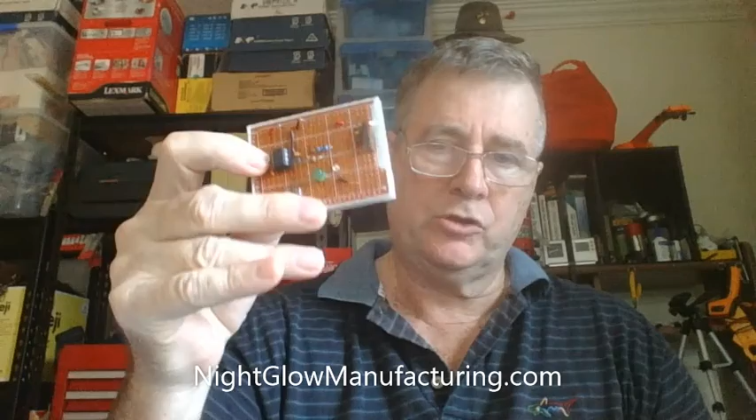What we're going to do is make this little project box that I built for this little board. This is a standard size board you buy, just perf board, nothing special. You can buy these in packets—I bought a packet of 50 or something. What they do is hold your little testing or prototyping projects. This is a testing one.

This takes a programmer. But as you can see, the box just holds my little perfboard PCB and stops all this stuff from shorting out on your desktop. Pretty handy little thing—that's the permanent home for that one, made specifically for that. I cut this out, but I could have incorporated that into the design had I thought about it a little bit more.

As it stands, this little board has done its job. I'm now finished with it, and I need to make a couple more for different reasons. It's actually led me in a new direction of research, and I've got to build a couple more boxes, so I thought I'd do that and share it with you guys.

What we're going to do is open up a copy of OpenSCAD. I want to rebuild the file for that little perforation box step by step with you, and explain what it is I'm doing as I go. Now, what I'm going to teach you is a thing called object-oriented design. It's not in the strictest form object-oriented programming—let's get that out there. It's not that.

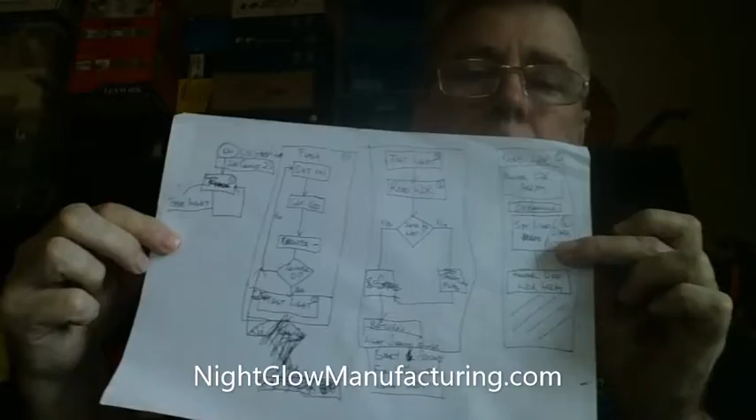What you've got to start off with is some kind of idea of what you're trying to design. Now, what I did was I drew mine out on a piece of paper, and I'm going to do that again right now. I want you to see that nothing happens without some direction. The best way for people to get direction, I think, is to sketch it out. Everything I do has sketches in it—it may not look like much, but these are all plans for things. This is another plan I did for something else. So you always want to start with some idea of what you want, and I always find it helps, even if it's a stick figure, to kind of sketch it out. Even with just an old pen someone gave me from Australia Post, I want to sketch out what this thing's going to be.

So I'm just going to really quickly design this thing. It's going to have—now I know you can't see what I'm doing, but I'm just going to sketch it out. I'm not the world's greatest drawer, let's put that out there. This thing's just going to be like this. It's got to have a bit there for the programmer to come in.

It's got to have a thing in the corner. It's got to have a thing to support the PCBs. So they got to be in there.

I'm not the best drawer in the world, but you'll get the idea when you see what I've come up with. So there it is, and that'll go there, down, you know. So that's basically what we're going to be building.

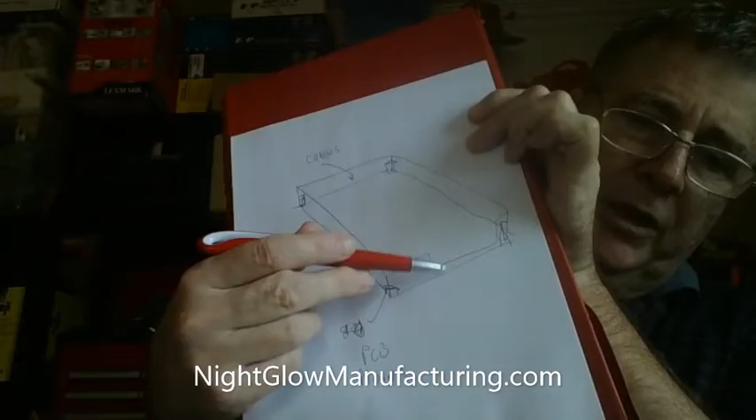So we've got a chassis and we've got PCB mounts, and this thing here will be the cutout.

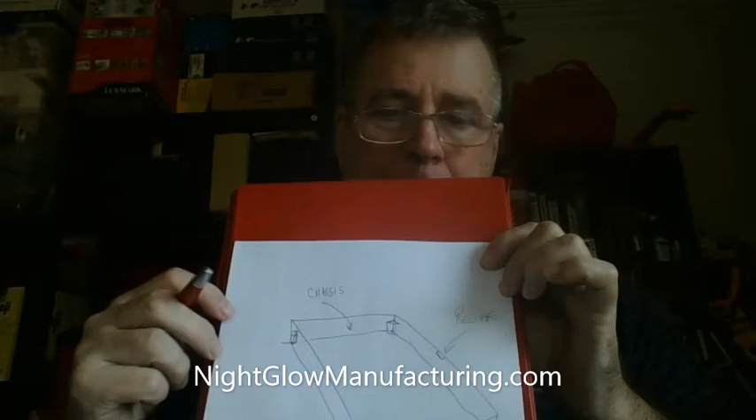I'm also going to put one other thing in the box which I find would be useful. I'm going to put a relief notch in it so you can stick a screwdriver in under your board and flick it up out of there. Because when you're building the board, sometimes you've got to make changes to it, and it's not always good to stick something in underneath this, which is a little bit fragile, and it really needs more support.

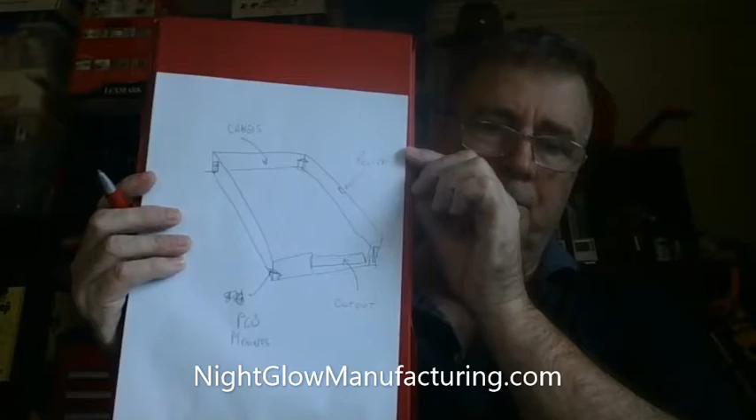Actually, that's something to think about, whether you build a little thing underneath it to give it some more support, because it's where the plug goes, right? And it can get quite fragile, so you might think about what you need in there.

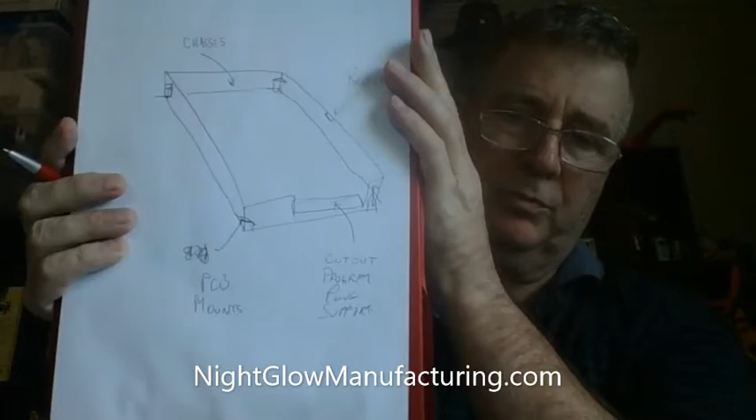So: cutout, programmer, support. So that could be a program plug support. I'm going to think about that and think about whether to include that or to do that as a modification to the design at some point down the road.

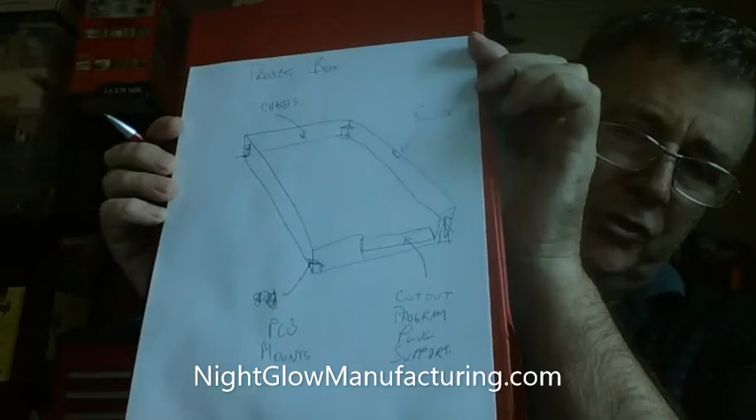That's our box. And I'm going to call this our project box. So now what I'll do is I'll start a folder called Project Box Design, and I'll put that in it, right? And we'll keep that.

Now the first thing we need is some measurements, and what we're going to do is we're going to measure off something that we've already got. Now I already know what these measurements are, obviously, but I pick up one of my boards and I want it to fit these boards. So I already know my length. My length goes this way, that's my Y, and that's my X. So that's my X and Y inner dimension. So we've got the X and Y inner dimensions, right?

Then I want to decide how thick this is, and what I've done is I've made this 2 mil thick. So I'm just going to make some notes on a bit of paper over here. I've got my X dimension, Y equals, right? And I'm gonna call Z... I think I called that 10 millimeters.

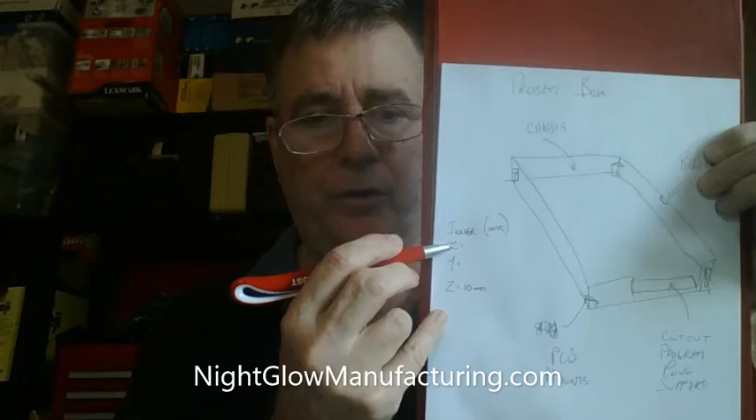Righto, so from this scratch we've now got ourselves a plan, right? So we've got our inner dimensions X, Y, Z. I know these values, I'll get them from the software and fill these in later on, but this is our plan, this is what we're working to.

And what we're going to do is we're going to build this as a module, we're going to build the chassis as a module, which is basically our box. We're going to build our cutout as a module, and we're going to build our relief as a module. Okay? So this and this will basically be the same thing, only they're going to have different dimensions.

Right, it's going to be a much bigger cutout than this is. Righto, so let's get into it, let's start working with it.

Now I'm going to swap cameras.

Now all we've got to do is collect all this. We collected this here. We've got X, Y, and Z. We've also got a thing called thickness, which we've called thick.

And I'm going to call that 2 millimeters. X and Y we don't know, so there are our dimensions. We know the thickness of our PCB, right? It's 2 mil, so it's the same as thick.

Alright, so let's just call it a value, and that way we can change the height of the PCB in the box. So let's call it the PCB offset from the top. Let's make it 3 millimeters.

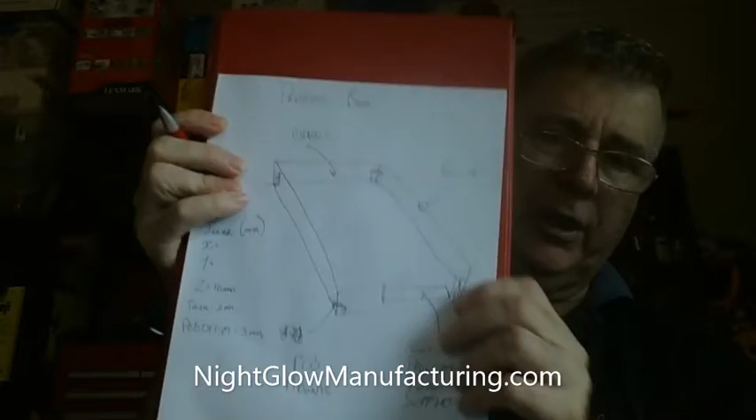Right, so we've collected some variables, here they are, here's our variables. We've collected some objects, here they are, we've got those. Now we're ready to start thinking about how do we bring this together as a project. How do we do that?

Well, the answer is we follow our plan. Well, let's get into that. Now I'm going to swap cameras on you.

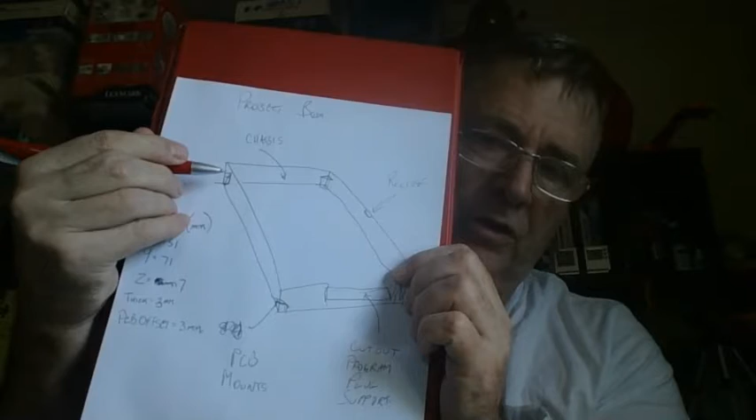We used a 3mm shell wall, and our PCB offset is actually the same as our thickness. So the depth from here to here is 3mm, and the wall thickness is also 3mm.

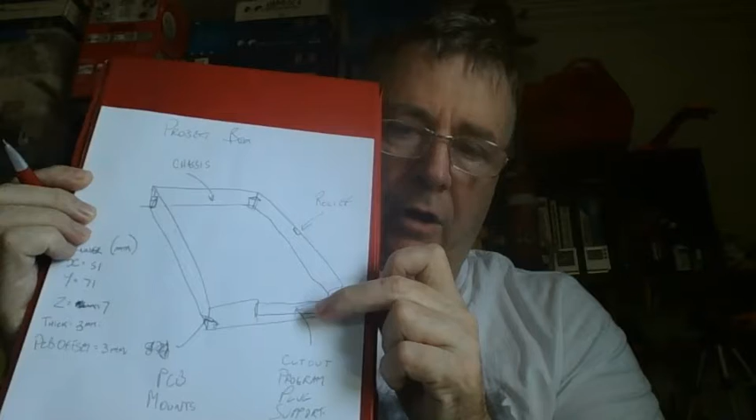Now I haven't decided about this yet, except that the depth needs to be whatever the PCB depth is, plus 1 millimeter, so you can get a screwdriver blade under it and pry it up. So this relief here, this will be 4 millimeters, which equals PCB depth plus 1 millimeter. So we're getting together some values for the properties of these objects.

That's what we're doing, and as we're going, we're modifying our drawing. So we've got our X, Y, and Z. We've got our thickness of our wall. We've got our PCB offset, so this is the offset.

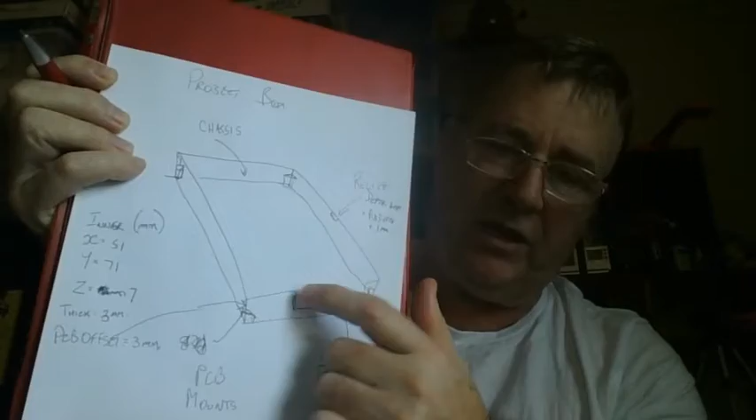I've just done this roughly. So our offset now has an arrow to this that represents that gap. We haven't got these dimensions yet, which we can get fairly quickly because we've got them right here.

It's exactly 40 mil, so that's 40 mil. We could get away with 35 because it's got bevels, with these beveled edges, these rounded edges. That's 35, and that gets us in deep enough.

So let's make it 35, our gap. That'll do me. Alright, so it's going to equal 35. It's in the wrong place. 35 millimeters wide.

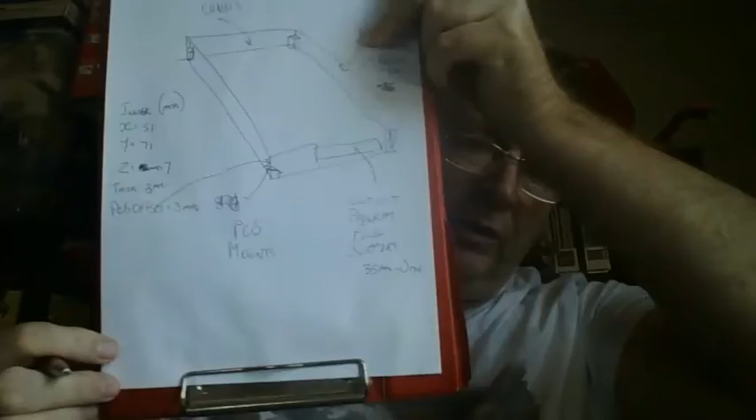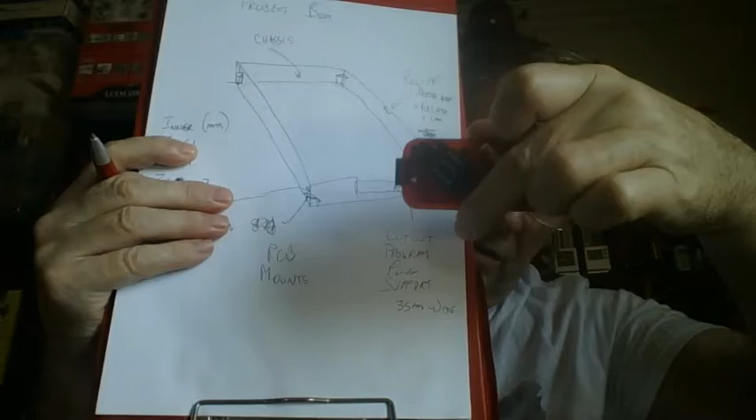So what I'm doing is I'm adding more properties. This is our cutout. This should be 35 millimeters wide, so that the end of that can go into it. So that'll go in — look at that, almost drew it to scale. How's that? How good's that? Almost drawn to scale. How's that for a coincidence?

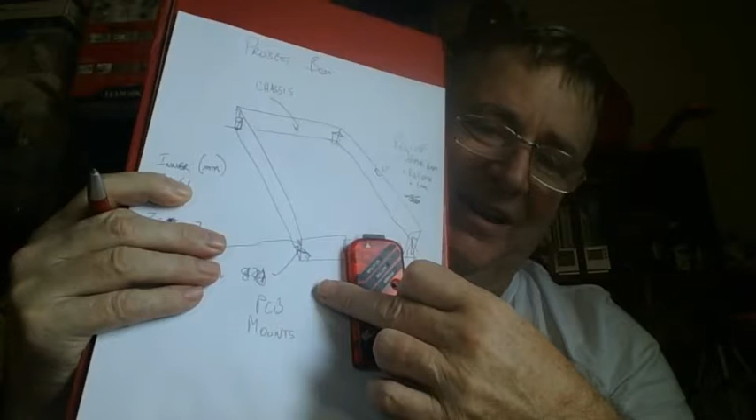It's a sheer fluke, but it'll go in enough that it'll connect with the — what's that thing called? It's called a header, right? That's what it's called.

Alright, so what else? I really don't know what else to do other than to get into it.

I've got a whole bunch of measurements. I'm going to swap over to the onboard camera.

I've changed my shirt, as you can see. It's still really hot here. It's humid. The Australian bushfires have not gone anywhere, they've really made our weather stupid. And even though there's a breeze out there, it's blowing in the wrong direction for this unit to capture it. So I'm getting a little bit of a breeze every so often, but once you get out of the breeze, it's hot and muggy. You wouldn't believe just how hot it is.

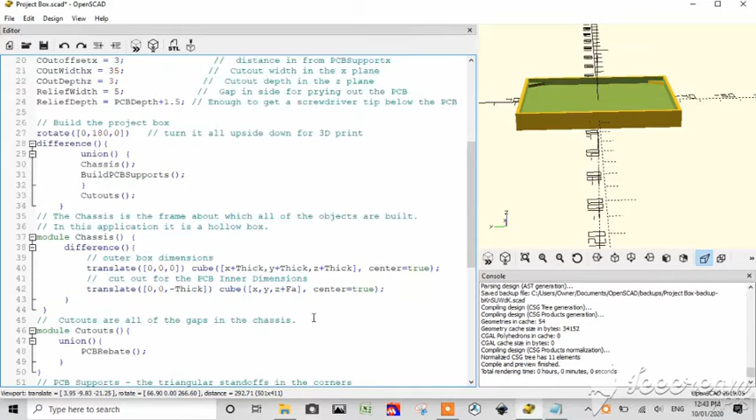So we're just going to keep pressing forward. OpenSCAD open, and I always start out my projects — just don't read into all this stuff for the moment. I just want to talk to you about how to lay out your project. I always start out with, you know, what version and what the project is. So this is version 1 of our project box.

I always use who's done it — if one of my employees has done it, their name would be in there. Why is it whenever I start to record, some idiot goes up the street? Anyway, or either that or the whippersnipper guy starts up. Anyway, designed by me, and the date I designed it — I actually did this on the 21st of August in 2019. So I actually made this sketch some time ago. I've now decided to release this, so I'm going to put a disclaimer in here, and that's it.

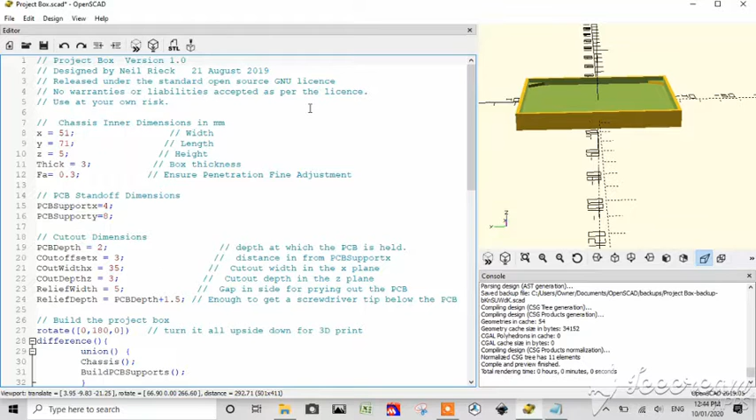Okay, but a project box doesn't require any further explanation. It is what it is — it's a box. So now what I'm going to do is build this with you on the screen. Here's one I prepared earlier.

Where we actually build it is right here in this section. This is it. So what we do is we create the chassis, which is this outer box. Let's show you - I'm going to comment out the pieces.

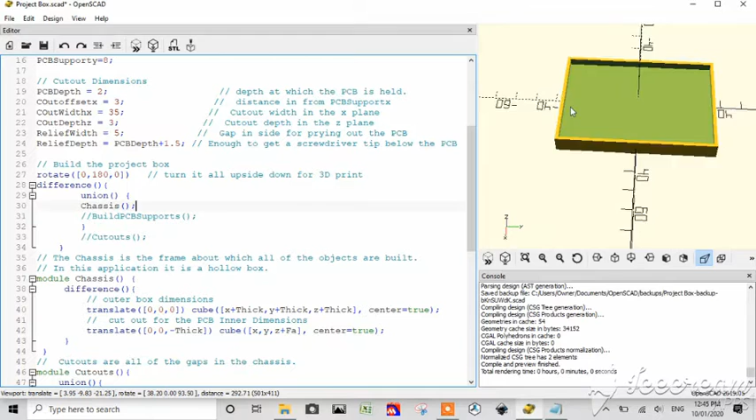Now the two slashes like that are comments. So I've commented out everything other than the chassis. Alright, so the chassis is over here. Here it is, and what this is, is a box. There's nothing special about this - it's a hollowed out box. It's essentially one cube inside of another cube. That's all it is. In our instance, what we've done is we've built this chassis.

And here it is. The chassis is the frame about which all of the objects are built. In this application, it's a hollow box. If I had a more complicated shape, it would go in here, or it would be built here as a result of whatever properties and methods go into making it up.

Now here you can see I'm using some variables. Here's my cube, my first one, outer box, and I'm saying I want a cube. Now at this point I'm going to show you something. If you're connected to the internet, you have a fairly substantial help available to you.

You need to be connected to the internet, and here's a thing called a cheat sheet. Now this cheat sheet is your best friend. So when we go in here, you can see it's going to OpenSCAD's cheat sheet index, and this hasn't been updated since May, right, for this particular version.

Now here's our cube. It's a 3D object, and here is the syntax for the script - cube, size, center, blah blah blah. And down here somewhere, there it is. It's also got a thing called box, which can do the same thing. But here's your cube.

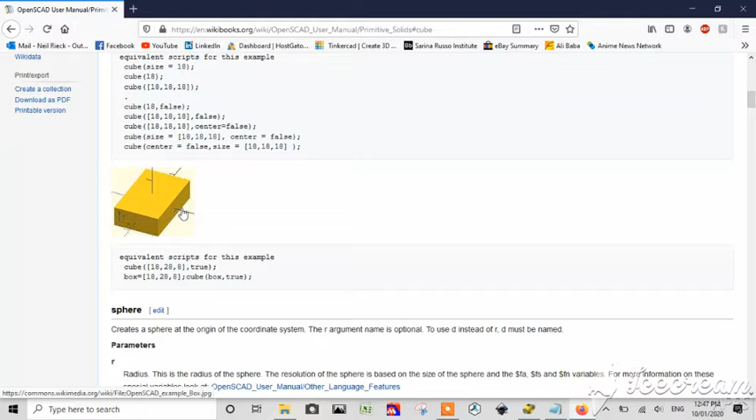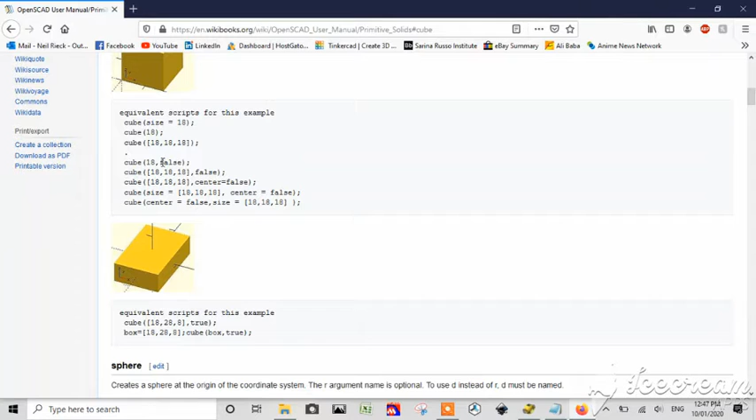So if you want to center your design, it means putting it equilaterally around the origin, which I like my chassis to be - centered, sort of in the middle. That's not always the case, you don't always need to do that. So you can do a basic cube like that, or you can do false. This one here isn't centered around the origin, it's actually butted up hard into the origin, XYZ.

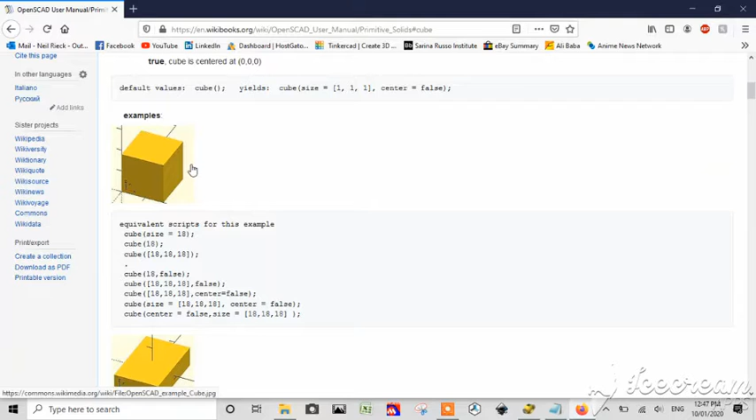So this is your best friend, this little cheat sheet. You can go back and you can see you've got 2Ds, you've got 3Ds, you've got union, difference and intersection. These are very, very useful things to come to understand.

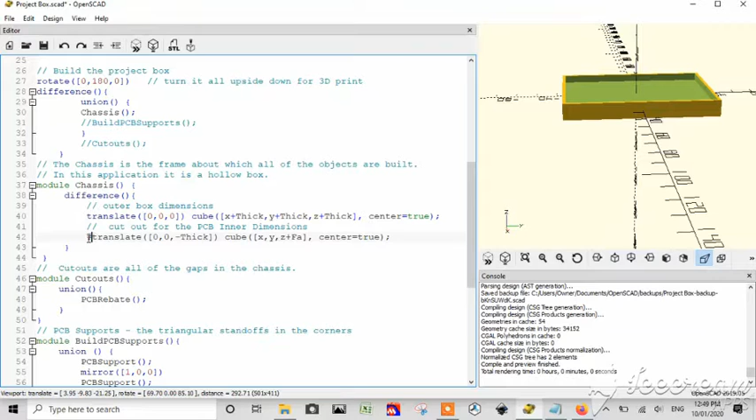So let's just minimize that for a sec and come back here. So here we're using difference. What we're doing is we're putting one cube inside the other. Now what I'm going to do is use the highlighter - the highlighter is this little hash sign, so you can see what's going on. There's the second cube, and you can see I'm using it to cut a piece out of the first cube based on the thickness that I wanted it.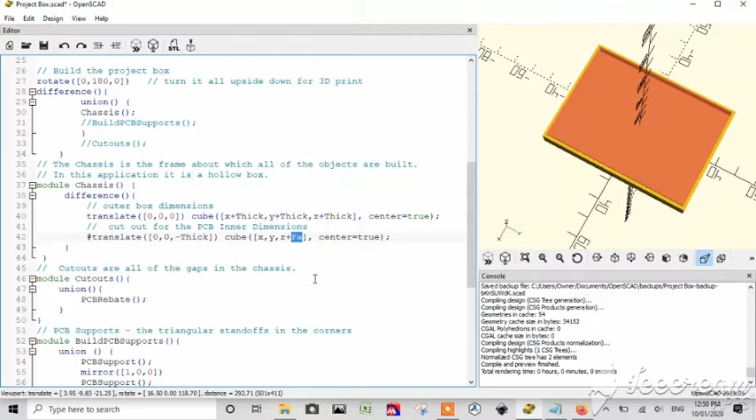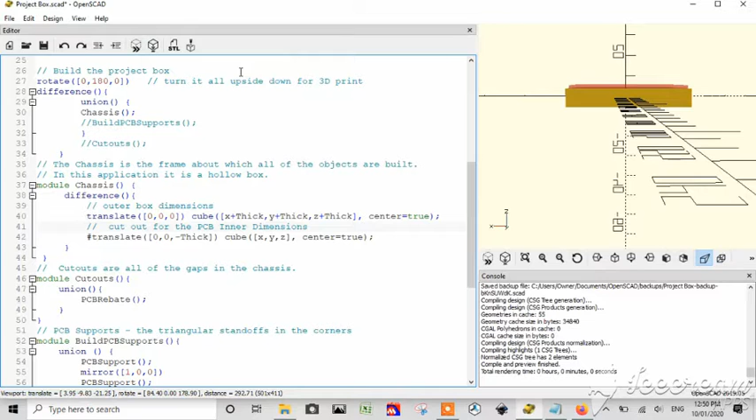Can you see that? Now I'll talk a little bit about this variable here, this FA. What you want is you want to make absolutely certain when you're cutting something that it penetrates. If I took this FA out and rebuilt that, in this instance my cube is actually perfect. Let's just take thickness out - I want to show you what happens if you don't penetrate with your cut.

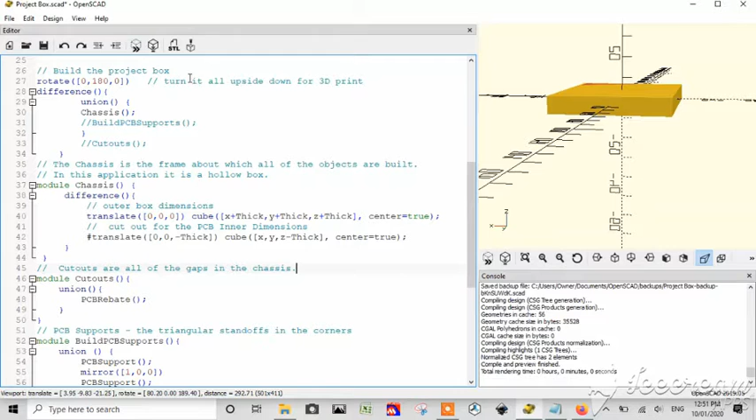It should be Z. I think it's going to be minus thick. Yeah, that's what happens, see that? You get this random result, the software really doesn't know what to do with it.

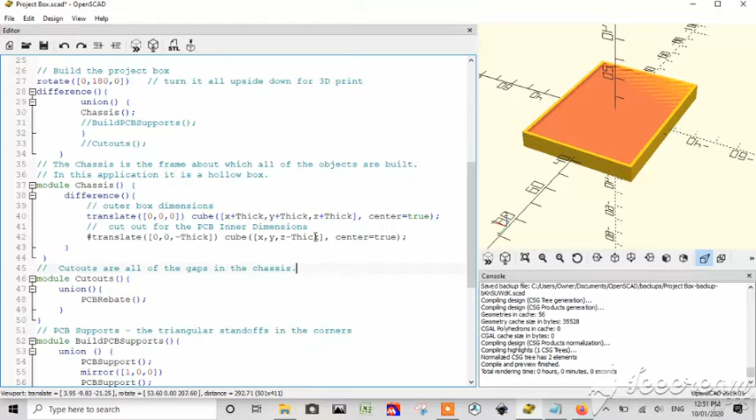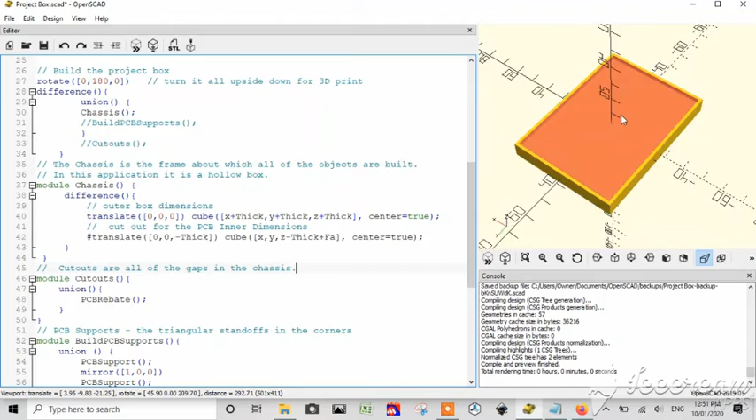But if I put in the plus FA, which is fine adjustment, I've actually declared it, and now when I do it, that randomness is gone. I've got my penetration. So what I've done is put in this 0.3 of a millimeter fine adjustment to make sure the design knows I want that to penetrate. And it's going out into open space, so it doesn't matter that I cut out.

If I had some objects up above here, I might need to assess where I'm actually cutting. But in this instance, the order in which you do things also matters. That's the next thing I want to tell you.

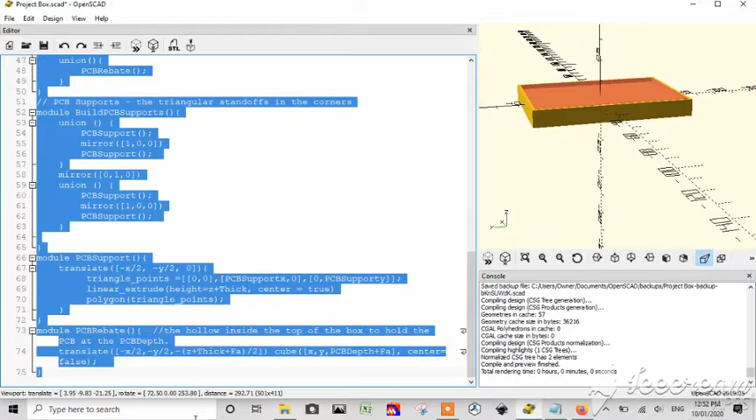Now what I'm going to do is build this up in sections and go through and explain it. So we're going to delete all this, and we're going to talk about what we need as we go. Let's delete it and build it from scratch.

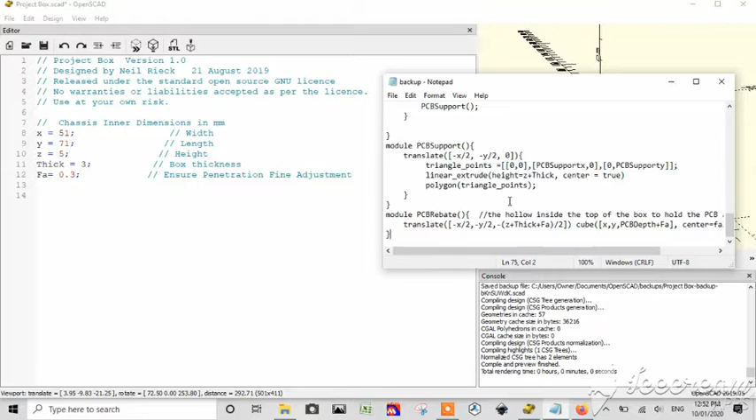I'll just leave those dimensions there. Now don't worry, I did a backup of everything, it's over here. And what I'm going to do is bring back in our chassis.

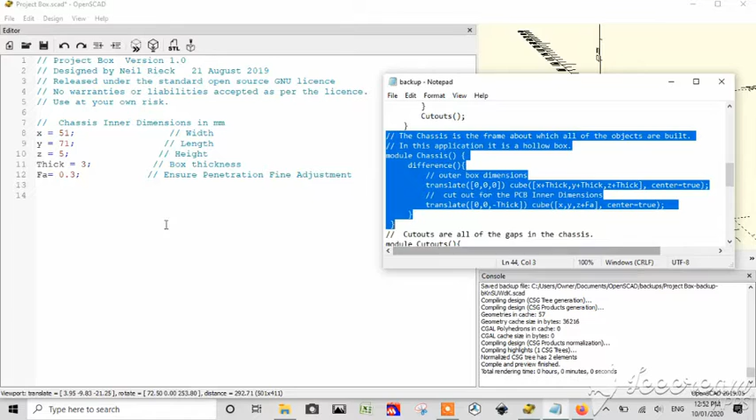Now there's nothing worse than watching people type, so I'm not going to type all this out, I'm going to spare you that. I'm not bad, but you know, it's boring. So here's our chassis.

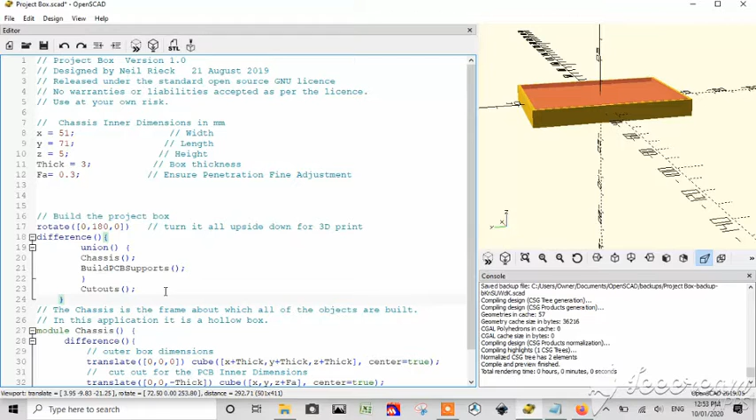Now we also need our build, so let's bring the build back as well. Now at the moment this script doesn't know what this method here is. These are methods, right? When you see this, it's calling these modules, and each of these modules actually builds up the object. That's what it does. So here I'm building the project box.

Now this is actual script, it's not encapsulated within a method. I could have actually encased this in a method. In fact, I could have said module build project. Right? So this is C, this is C syntax.

And up here, I could have just called this single method called build project, which is not a bad way to do things, because in build project, everything is actually built. So within this, I'm actually changing the aspect of everything, and then I'm doing all of this. Cool, okay.

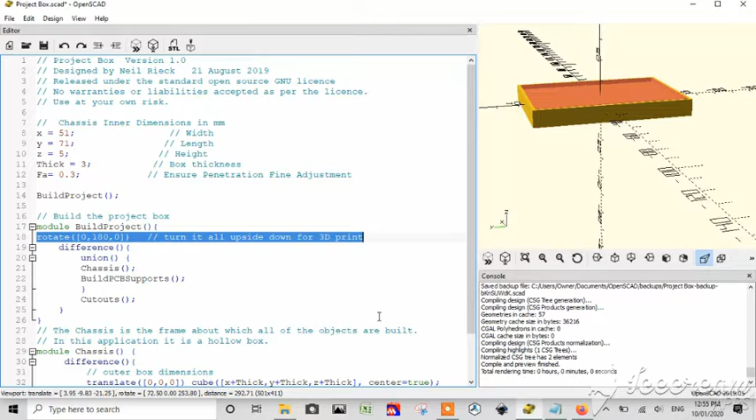Maybe that doesn't belong in there. Just for the moment, I'm going to take it out of there and put it back up here.

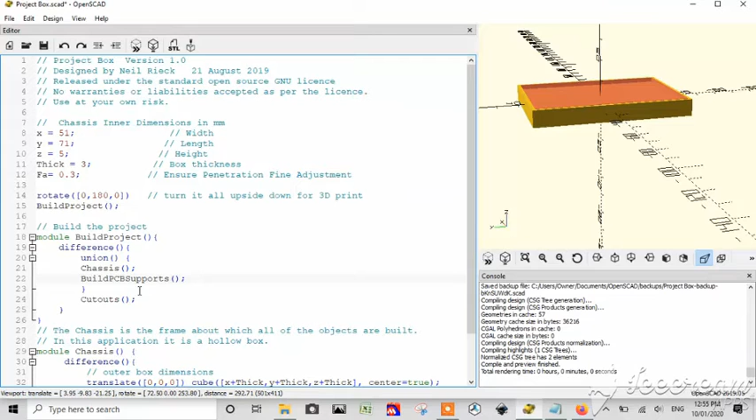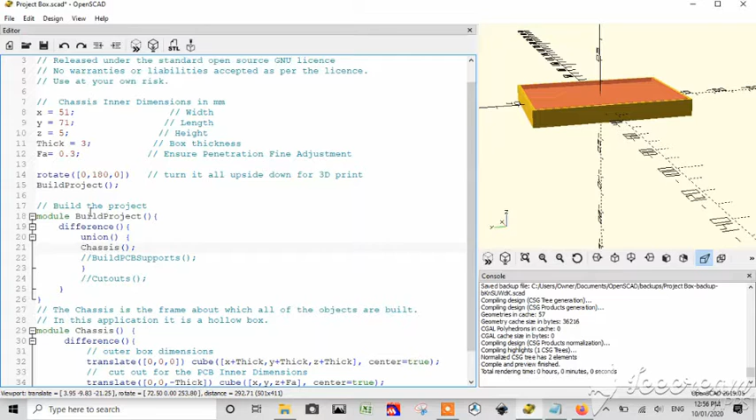Okay, so what we're working on is this chassis, and we don't know at the moment about these supports, and we don't know about cutouts because we haven't declared anything. All we've done is declare this chassis. And what we should find is that I've given this enough information. So here's the chassis dimensions, which are required to make it all work, and we can run it, and here it is.

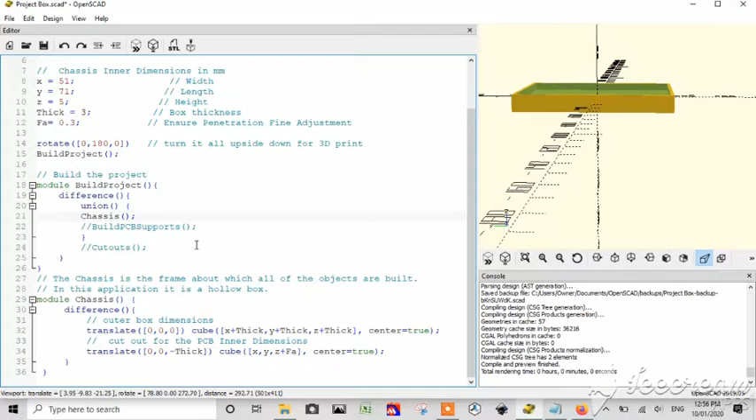There's our chassis, all built. Now please remember, I am releasing this code, so don't madly think that you need to copy all this down. But if you're following along using this code, then you'll be able to change things. You'll understand what all this means.

Now let's just change a few of these numbers just to show you that they do change. So let's make it 61 millimeters wide and rebuild it. Look at that, it got wider. Let's change it to 101. Run it. There you go, got longer. Let's change the Z.

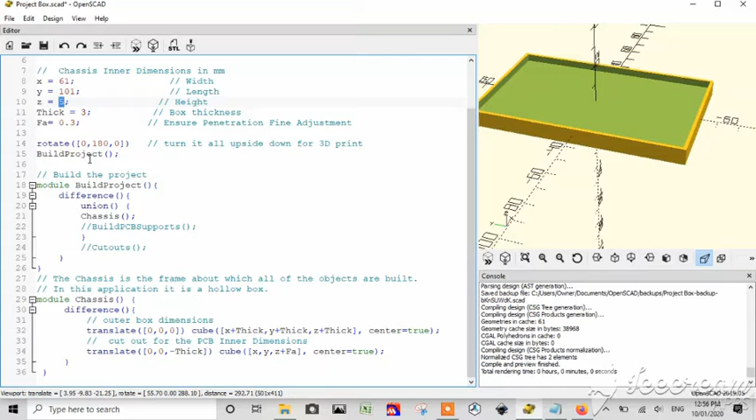Let's change it to, I don't know, 20. There you go, I've got a really deep project box, look at that, it's just a box. But by changing these variables, we can now change the attributes of our project, and we can build bigger and bigger boxes.

As we get bigger, I'm using control with my mouse wheel to zoom it in and out, and you can see it gives you a convenient measurement, right?

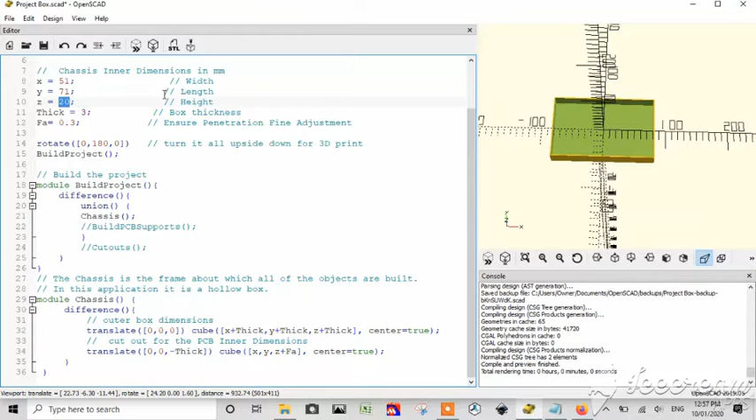7 mil high. Run it. There's our box. We can zoom in using our wheel.

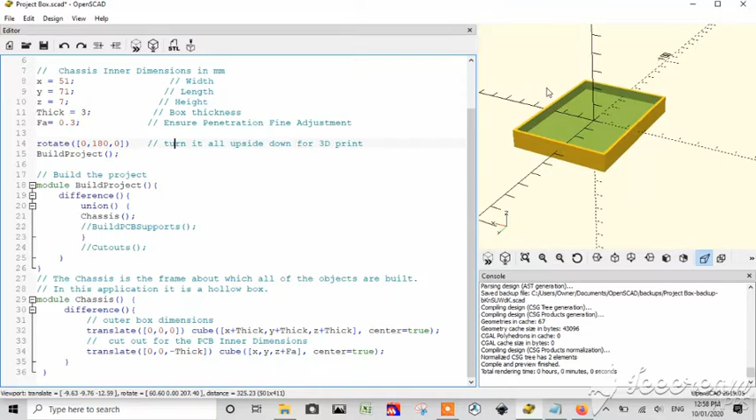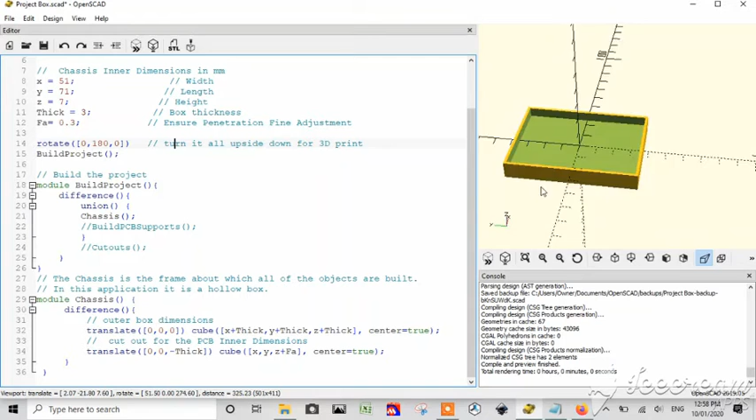Actually, you don't need the control, just your wheel. So I'm using the wheel on my mouse. The older versions did need the control, I think, but I'm a bit old school sometimes. Yeah, you didn't need the control key. So by zooming in and out with the wheel, that's what I'm doing. And when I hold down my mouse, I can move the mouse, and that's how I'm rotating the drawing in the plane. So there's the X, Y, and Z. Basically, that's how our box looks.

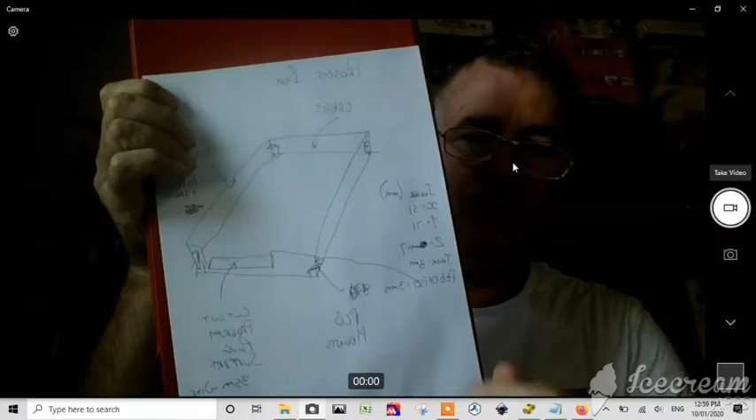And group them by your objects. So as you go through your drawing, we had the chassis. I showed you the, hang on, see if I can show it to you. So we had the chassis, we had our X, Y, and Z, our thick, and the only thing missing from there is our Fa, which we've just nominated. So hopefully that came up. So there it is, X, Y, Z, thick, and our fine adjustment of 0.3 of a millimetre. Just to make sure we get through that layer and that we get our penetration, our cut.

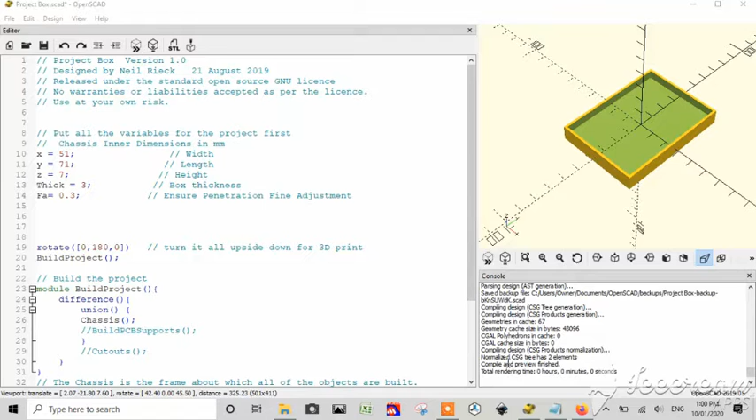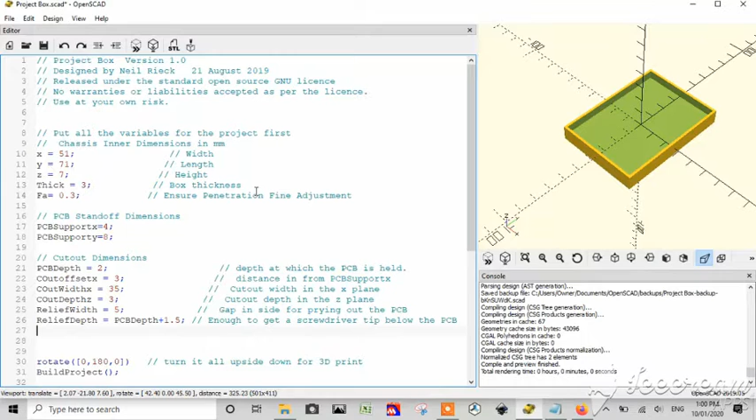Right, so now we're going to put in the PCB supports. So we've got our standoff and our cutout. I'm going to bring all these dimensions in because I don't know what I used where. I've gone through the drawing and I've collected all of the variables I'm going to need, plus a couple that I think I might need.

Now I'm going to call your attention to this variable, relief depth. And what I said was I wanted a 1 millimeter, well actually I've called it 1.5 millimeter gap underneath our PCB depth. So you can declare a variable with a relationship to a variable provided you've already declared it. See that? So if you've already declared it, you can use it.

But if I declared that down here, so if this, for example, was down there, and I go to build this, I'm going to get a warning. It doesn't know what to do with that. See that? But if I put it back where it belongs, we're still fine, everything's working. So you've got to make sure that if you've used one of these, that it's already declared somewhere in the script above it.

That's the first trick to this. But now because I've used this PCB depth, wherever I build this relief depth, it will be related back to this PCB depth. And I don't have to think about, oh well, if I'd said this was 4.5, I changed the depth to 3, now I've got to change this to something else. Well, I don't need to think about that. It just happens, right? So compound variables or dependent variables can be built. So dependencies can be built into the project, as can compound structures.

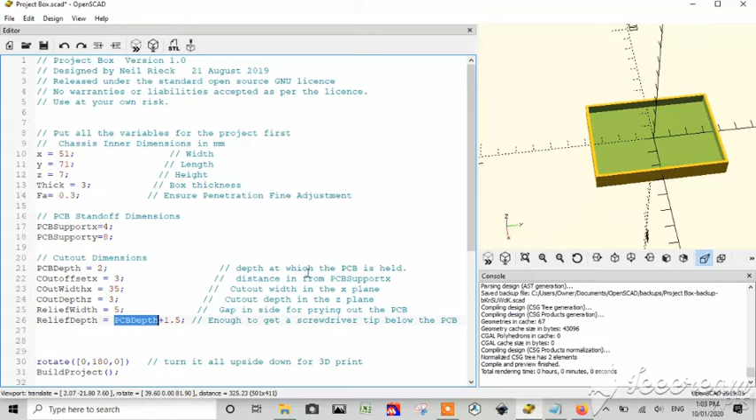So the next thing we want to do is build our PCB supports. Now, these are a little bit complex.

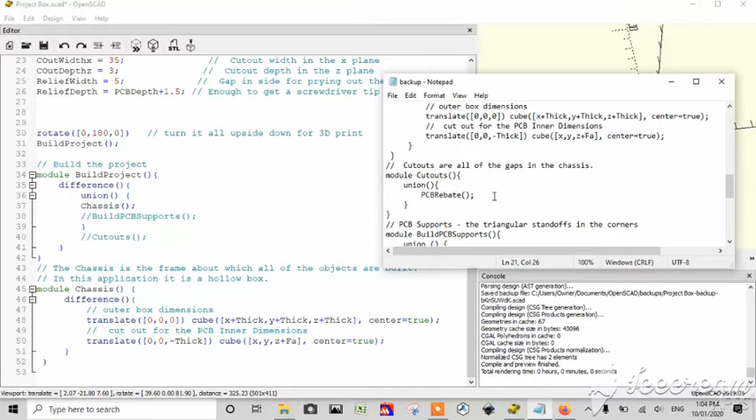Here they are, and you can see I'm using a method to build them. And here I'm actually building it.

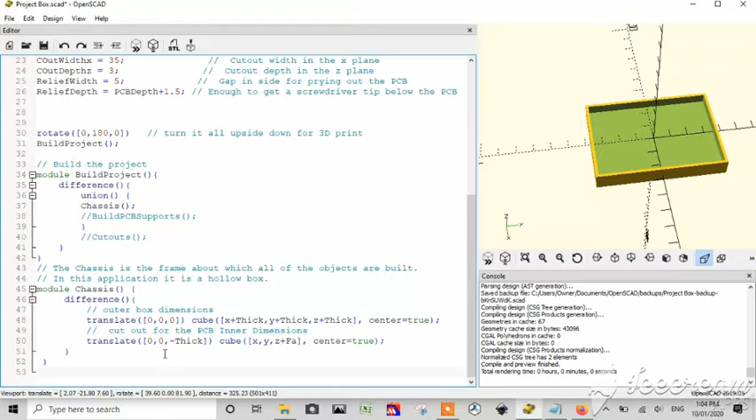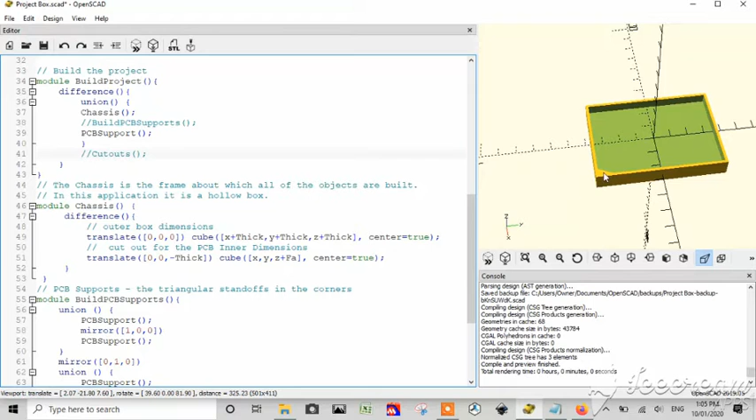Let's show you how this works. Rather than build them all, I'm just going to call PCB support on one of them, so you can see what's going on. So back up here in our build, I'm just going to call the method to build one object and run it.

What you should see is one of these corners is going to fill up with a triangle. Now I chose a triangular support, but I could have used a round one. These are standoffs basically, so I could have used squares, triangles, cylinders, anything. A cone, by the way, is built out of a cylinder, so you just change the bottom dimension of your cylinder and you get a cone. You can get whatever shape you think. The easiest one is the triangle, I think, because it just cuts away.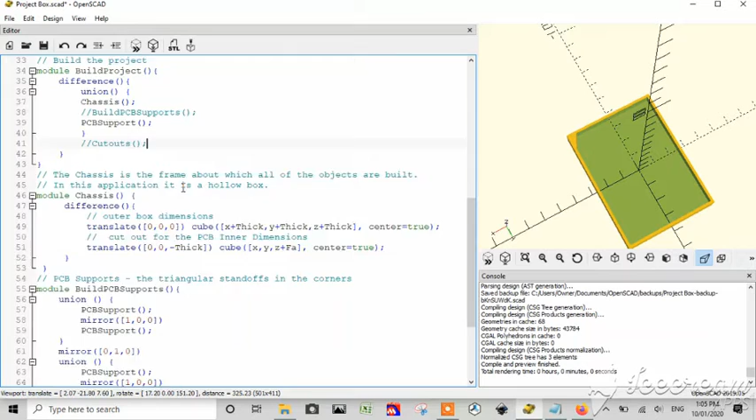I've decided to make it longer in the Y dimension than in the X, so I've said it'll be twice as long in the Y dimension. So I could actually do this - because I've decided I want it twice as long in my Y dimension, I could say multiply that by 2 and I'd still get the same result. See that? And if I change this to 5, I'll get a 5 by 10. And you saw it grow, right?

Now I like this thing because in the Y dimension we've got lots of length and it needs to be a little bit stronger there, but in the X it's pretty short, so this shorter dimension, half is fine, right? I could turn it into thirds by saying times 3 and then changing this down. You don't need a lot in the X dimension.

Now down here, I've got my cutout offset as being 3. What this means is I always want it to be - I've got to build my cutout so that it clears these supports. So I've said put it within 3 millimeters of the support. Now I've started talking about the cutout, but that has a relationship to this X value, so my cutout will actually start that plus that away from the edge of the box. So you've got to keep that in mind.

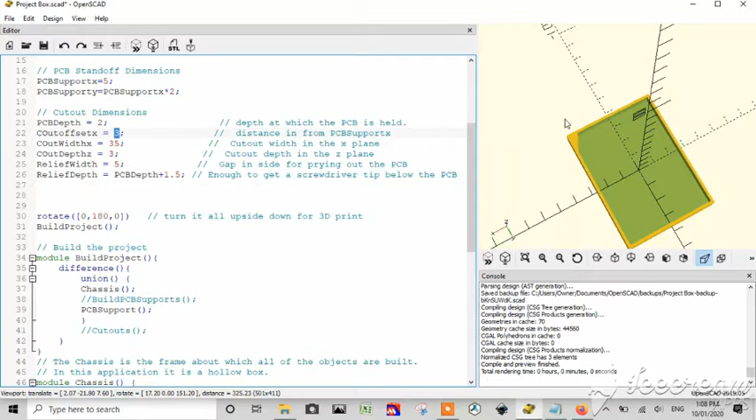Now the reason I said that is because in this project I have not built in any sanity checking, which means I could conceivably cut this box right past the end of that. It could go out here somewhere, my cut, so I could have my whole cut blasting through everything. I could have supports - well, these are actually tied in, so it's built within the software, but my support could be built out there somewhere.

But the way I've developed it, I've already given my X and Y limits up here, and I use them in the module. So down here, where I talk about my X value - now what this translate does is it moves the point of build. So what I've said is I want you to go out X - where's X? X is this way. Now if I went out the full value of X, I'd be out here somewhere. Let's just do it to show you what happens.

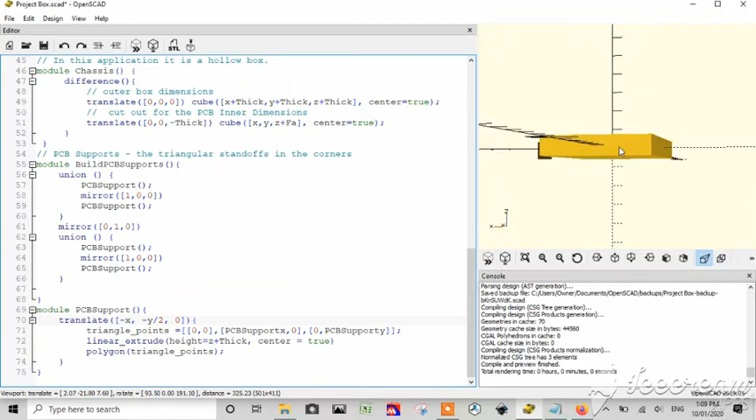So if I hadn't divided that by 2, this triangle won't end up where I want it. See, it's out here. So all I've done is put the triangle in the wrong position. So by doing a simple bit of math and saying, well, I know that my chassis is centered about the origin - you see that? Everything is about the origin. So by doing a little bit of thinking and logic, I put it where I need it.

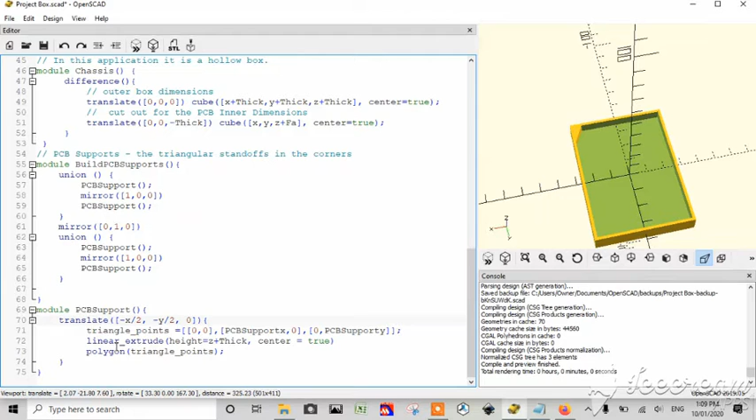There it is. Now remember our little highlighter? So if I use this little pound sign, see it gets highlighted, and I can see exactly where it's running, and I can see that it's beautifully touching out all of those surfaces. There's no gap underneath it, which is perfect. I want that to be a standoff from the base.

Now it took a little bit of thinking to get this right, but I got it. I had to play with it a bit. But you can see now too, it's also the correct height. And the reason it's the correct height is I had to add back the thickness in order to make it touch the base.

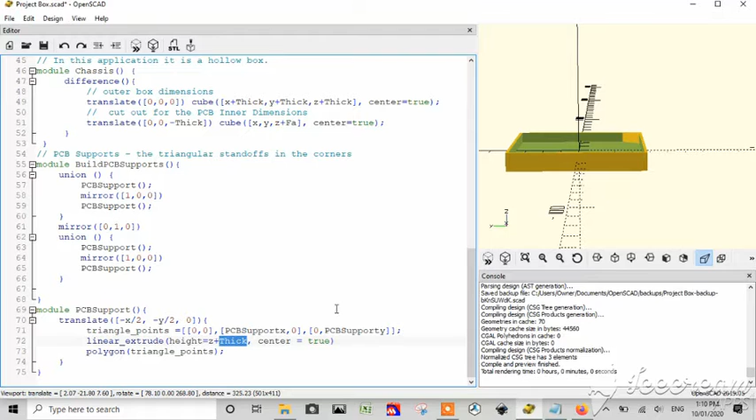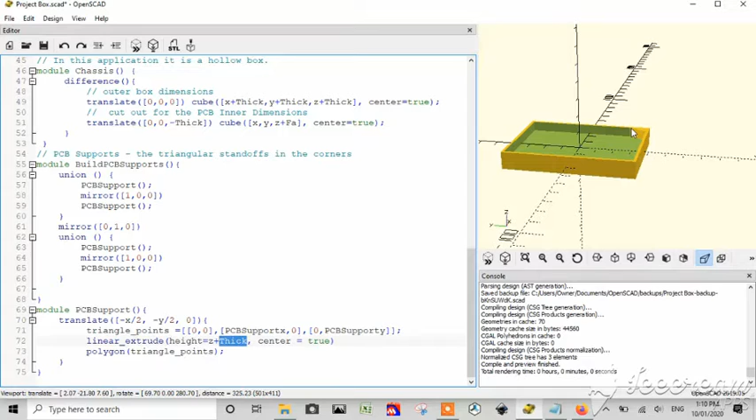Okay, if I just use Z, I was only giving it the inner dimension, and I was getting some funny things at the mating surfaces here. So make sure you want to get your support up to there, because what I'm actually doing is the PCB rebate cuts this back. So when I build my PCB support...

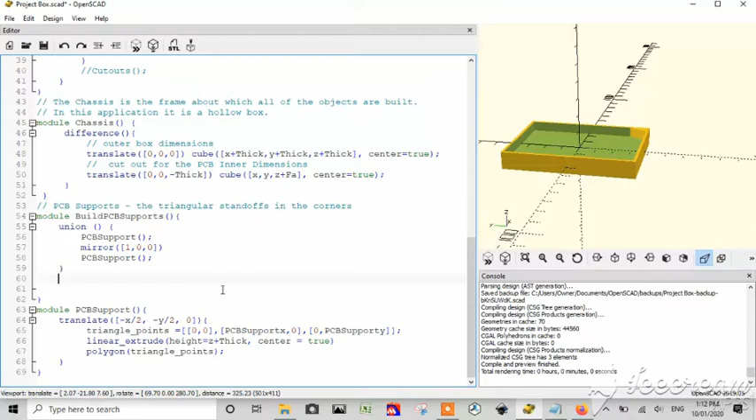So let's go down here, and here we go. Build them. I'm building one and using it to mirror to the other side, and that I've used union, right? And then I've just taken that whole thing. Let me comment this out, by which I mean deleted. So let's just do that for one. There it is, it's mirrored. And then I've taken all of that and mirrored it to this side.

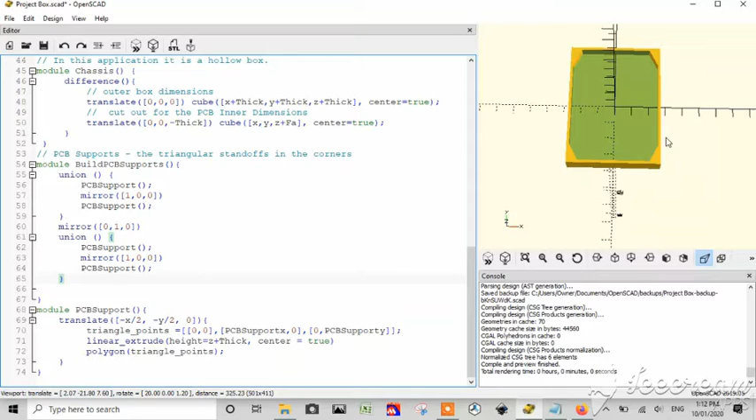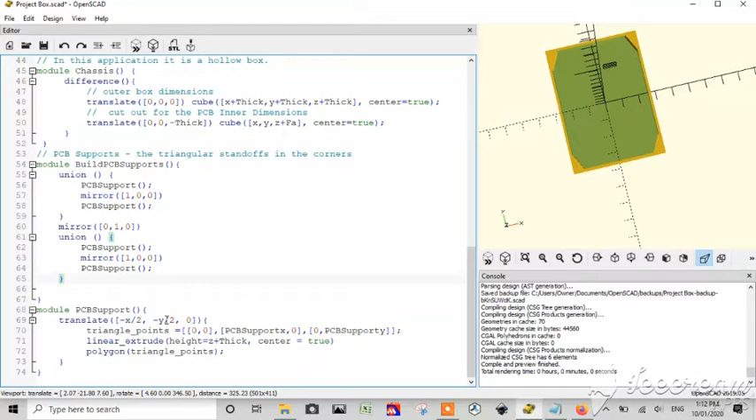Control Z, so you can see those two. Now you can see those two. By a couple of commands, I didn't have to type all this out and run the script 4 times, it's done that for me based on what I fed it. So this is mirrored around the X-axis, this is mirrored around the Y-axis. By doing 2 mirrors, I've built everything I want in the corners of my box, and they're proportional based on the values I gave my first build. I only built it once, I didn't build it 4 times. The software did that for me using mirror.

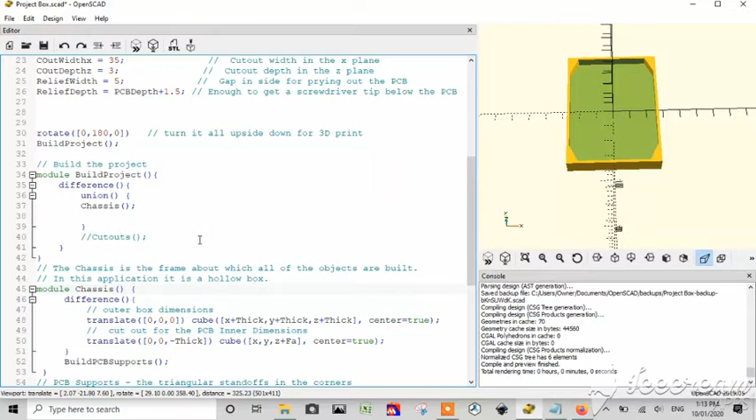So now we've got our supports, we've got our box, which is actually our full chassis. Now why didn't I put that under chassis? Well, I could have, I could have taken this out of here and put it here. So now our chassis is built up of a box and some standoffs, and you can see we've got the exact same result.

The point is, I like to keep the chassis as being the chassis and the supports as being another object. Some people might argue it's part of the chassis, well, I'd argue against that. I think if you had to build this up, you'd have to weld those on, or glue them on, so I'm saying they're separate. They're four little bits that get glued in there or mated in there, or whatever you want.

Righto, so now we've got to do our cutouts, and our cutout has, we've got 3 of them. Let's go back over to the camera for a sec.